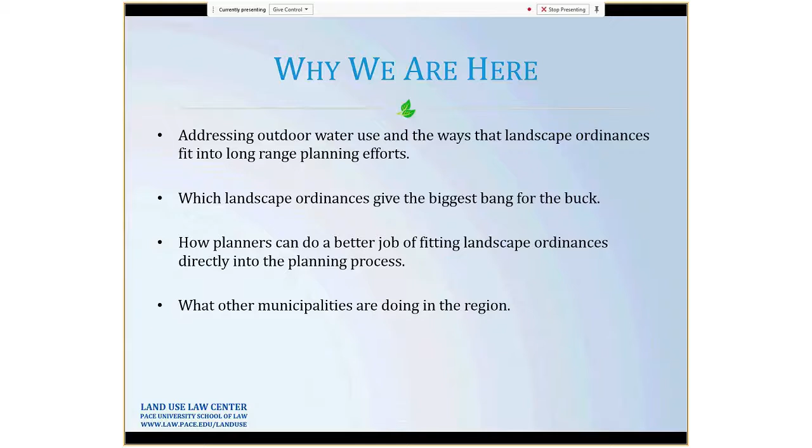We've got all sorts of folks on the call today too, from local government planners to water efficiency folks, green industry people, so we've got a good cross-section, and I'm really kind of happy about that. We've had a really good cross-section for all these webinars. So without further ado, I will introduce Rick Schultz, and I'll let you take it away, Rick, and I'll be back to take some questions at the end. Thank you.

Thanks very much, Kevin. I appreciate it. So for those of you listening in, I don't know exactly where you're from, but I just wanted to give a really quick overview of who we are. So the town of Castle Rock, we are a full-service local government that encompasses everything from police to fire, water, development services, parks and rec, and public works. So we do have everything under one roof, which does help from a coordination standpoint. Go ahead to the next slide, Tiffany. Okay, let's go one more, please.

Thank you. So as far as where we are, we're located along the I-25 corridor. We're midway between Denver and Colorado Springs. And something we think is really important to point out is that we are considered a semi-arid high desert climate, which is very, very important when you start talking about plants and landscape and irrigation requirements and all of those things, because that's critical when you understand that we are primarily a groundwater-based supply.

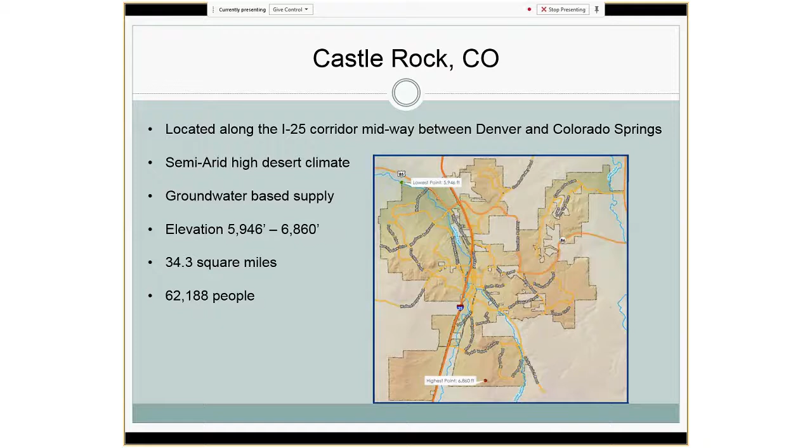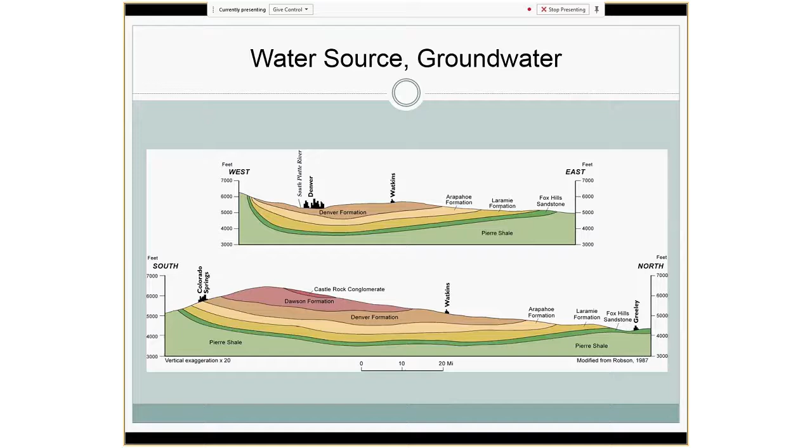Okay, so I mentioned that we are primarily dependent on the Denver Basin Aquifer System. That's our groundwater supply. And in spite of the fact that we are positioned quite well within the aquifer system, we still recognize the limitations, and we still recognize that we had a huge need to take care of our resources, conserve, and use water very efficiently. So go ahead to the next slide, please.

2006 was our first Water Conservation Master Plan that we filed with the Colorado Water Conservation Board. That identified a conservation goal to reduce from our current per capita 165 gallons per person per day down to 135, which was an 18% reduction. We were able to not only achieve that, but we exceeded and maintained that goal.

And then in our 2015 update, we identified a new goal, and that further reduced the projected demand from 122 down to 100 gallons per capita per day. If we achieve that, or when we achieve that, that will be an additional 18% reduction. Now, the other thing that's important to note there is that throughout all of this, it's obviously not sustainable. It's groundwater dependent, and we are very active in transitioning to more renewable sources. Go ahead to the next slide, please.

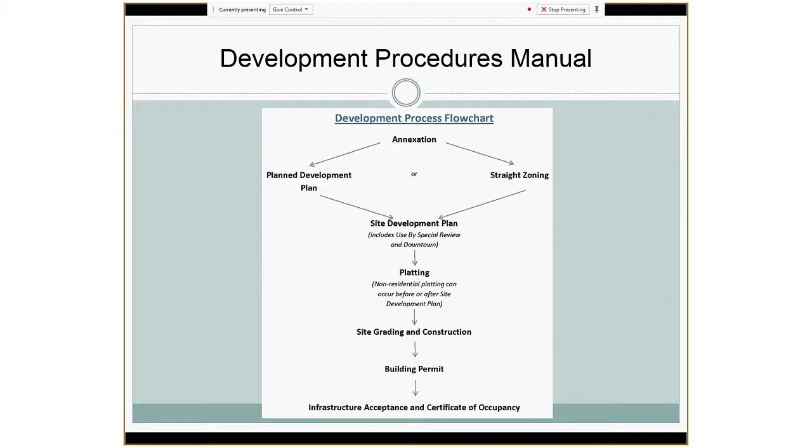And the other thing that's really exciting to think about at this process through development is that we are working with new developers, new communities that are proposing to come into the town. And so we have an opportunity through the water dedication, through the development review process, to actually talk about water efficiency, to talk about water conservation and what that looks like. And we've actually got several communities underway currently where we're working with them to develop a specific water conservation plan about how that looks specific to their development. So it's really fun stuff. It's really exciting. Let's go to the next slide, please.

So when you start talking about what you want your landscape to look like, soil amendment is critical, because without the proper soil amendment, you're really going to have to pour the water to it. You can keep anything green with enough water, but that's not really the goal. The goal is, let's prepare it right the first time, put ourselves in the right position to have a healthy landscape, and certainly not only that, but an appropriate landscape for the climate. And soil amendment is definitely part of that. And that runs the gamut of parking lots, streetscapes, multifamily, also not listed, but parks and apartment complexes, schools. We work with all of those organizations to make sure that what we're doing is actually appropriate and it makes sense.

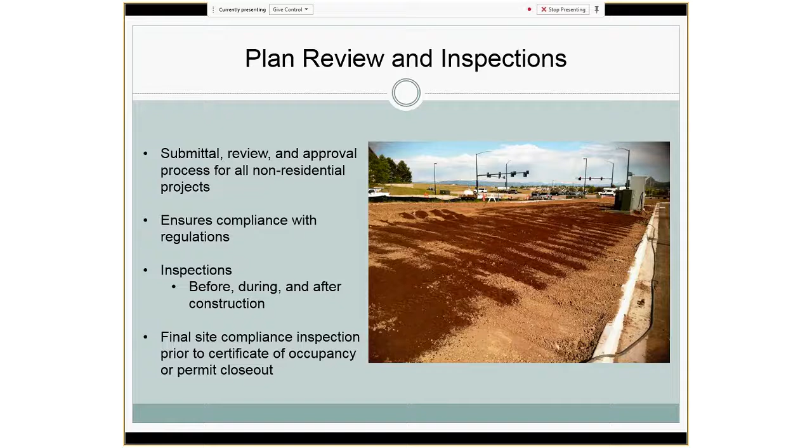Next slide, please. I've included this one just because this is a real-life example of a rain sensor, and I thought it was very interesting because it's installed basically where the majority of the sensor is obscured from above by the gutter, so it's not installed properly. And we've actually seen several examples of where equipment is not installed correctly. Actually, an extreme example of this is we saw an entire block in a residential neighborhood where the rain sensors were installed upside down.

So, it's things like that where you would expect a little bit better results from a professional landscape contractor, and I'm not sure what happened in this case. I think it probably was a training issue with one of their crew, but we were able to catch it during the inspection phase and get it corrected. Next slide, please.

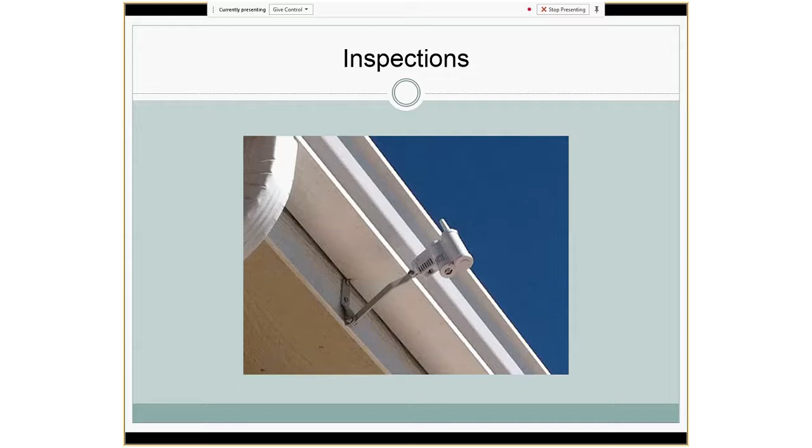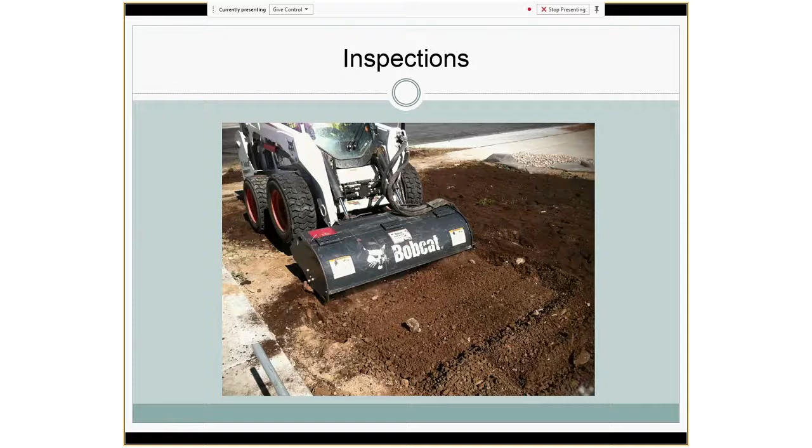And the other thing to note there is that, again, the ground is very, very hard, rock or clay in many cases, and so it does take some larger pieces of equipment. We've seen some people try and do this sort of thing with smaller equipment, and they're met with limited degrees of success. Next slide, please.

Next slide, please. And with that, I am done. So I'm going to turn it over to Lyle, and I think we're going to take some questions toward the end. Thank you so much.

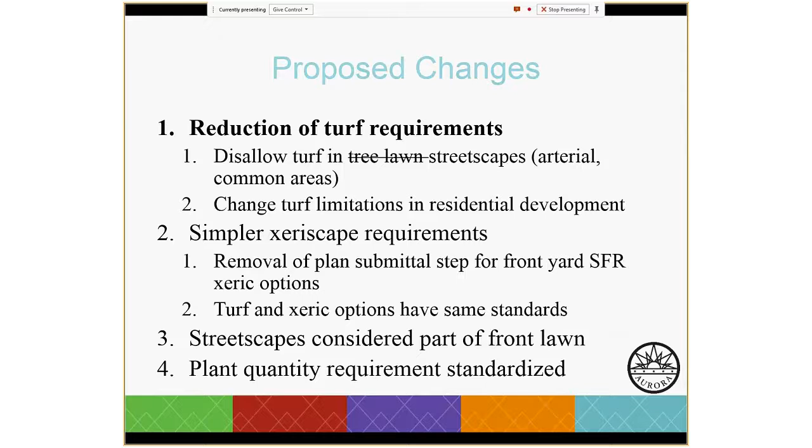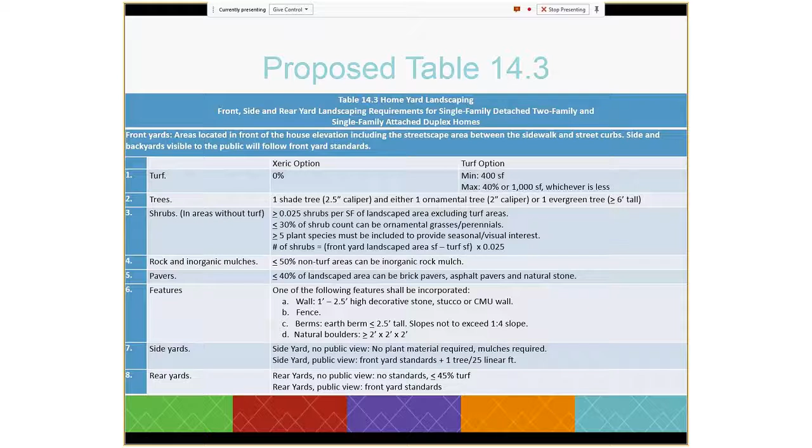And that's all well and good, but when you get to the shrubs, this is a very standard number, but again, 26 shrubs on a 500 square foot lot can look very different than 26 shrubs on a 3,000 square foot front yard. So we tried to make it standard and say that there's X number of shrubs per square foot, and we really tried to dial in that turf so that there was a maximum of 1,000 square feet. So even if you had an extremely large front yard, you were going to be limited. Next slide.

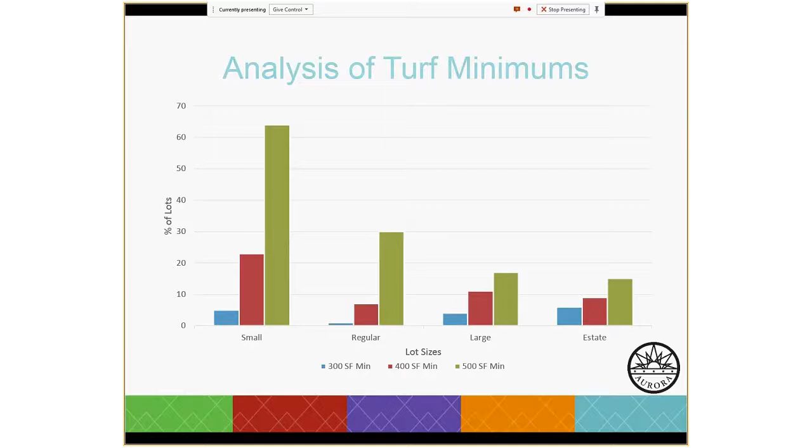We did an analysis of our lots throughout Aurora and all of the sizes, and we really landed on 400 square feet because we felt, based on the numbers, that not a huge amount of people would be affected, unlike the 500 square foot minimum, but enough people would be affected that it would make a change, whereas the 300 square foot option wasn't really going to do anything.

Next slide. So if we were to implement these changes, we're looking at potential savings of about 60 acre feet, or 31%, if the development in the next 5 years is the same as the development in the previous 5 years and the same type.

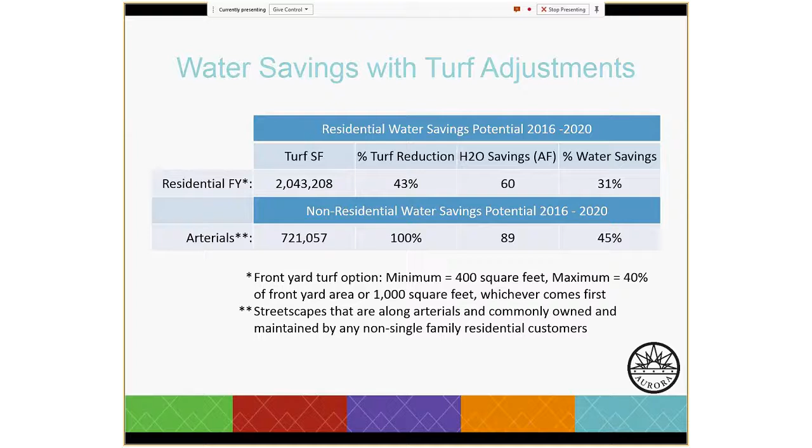One of the other things we're looking at that I haven't mentioned yet is that in Aurora, we have a lot of common spaces with HOAs or metro districts where there is a lot of irrigated area surrounding developments that is commonly managed. In these areas, we're proposing to remove the option of having bluegrass in the streetscape area at all. If we were to do that, predicting the same amount and type of development, we're looking at a 45% water savings just from removing bluegrass within that streetscape area. Next slide.

So the next 5-6 slides are renderings of what a typical lot would look like if these changes were to go in place. We'll kind of breeze through them, but the first 2 slides are an example of a small lot. Now, if we get the changes that we're looking for, and planning is putting them into the comprehensive plan they're developing right now, the small lot would potentially go from this to, next slide,

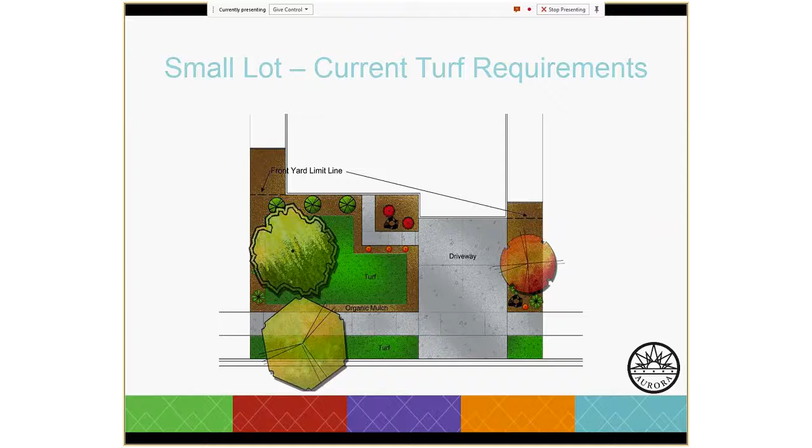to this. It really doesn't look like too much of a difference, but you'll notice that with that 40% requirement and including streetscapes in the front yard definition, homeowners or developers will be forced to choose where they want their turf. Do they want it in that streetscape area or in the yard? And we'll see a significant amount of savings. The other good thing is that by removing turf from the streetscape area, we'll reduce a significant amount of runoff, as you'll see in some pictures later in the presentation.

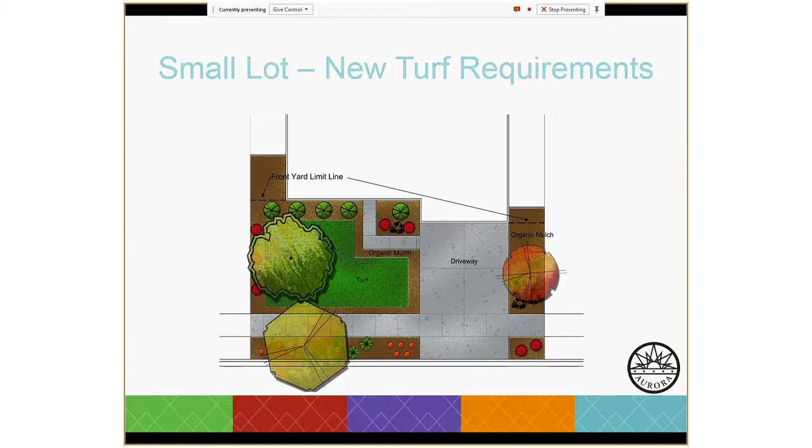All right, Tiffany, can you just zoom through the next few slides? They can look at them later, but essentially it shows you what it would look like now versus later. You can go ahead.

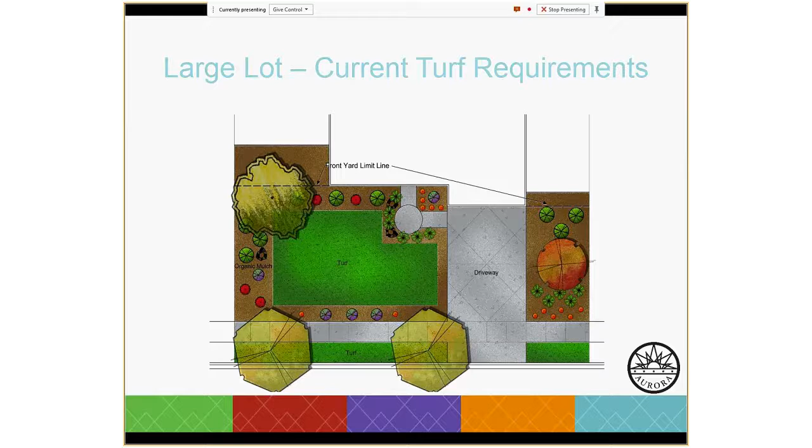All right, so let's talk about some of the incentives we have in place. Go ahead.

So in our code, back in 2014, we evaluated our tap fee structure. The way our tap fee structure works, especially for irrigation meters, is that you pay for what you put on the ground. So there's a dollar value per square foot for high water use area, Kentucky bluegrass. There's the dollar value for low water use or water-wise landscape. So up until 2014, we only had those 2 categories.

It doesn't show it on the slide here, but we went from basically 76 cents per square foot for the high water use to $2.75 per square foot, and essentially a 4-time jump as well for the low water use landscape fee. Well, as you can imagine, developers and builders really kind of freaked out a little bit. They got really concerned about the cost of their projects.

Essentially, this would bring, say, a 400,000 square foot irrigated area project from maybe a $200,000 cost to a little over $800,000, given the typical development patterns that we've been seeing. So that's a pretty significant jump for developers who are having to put landscape in before they can even build the first home.

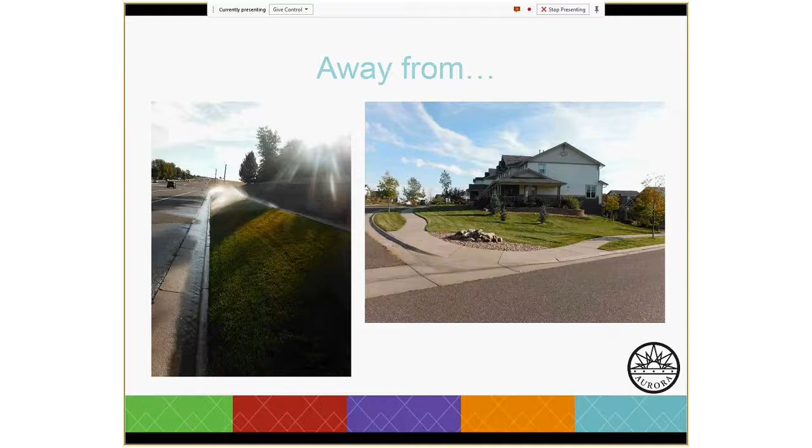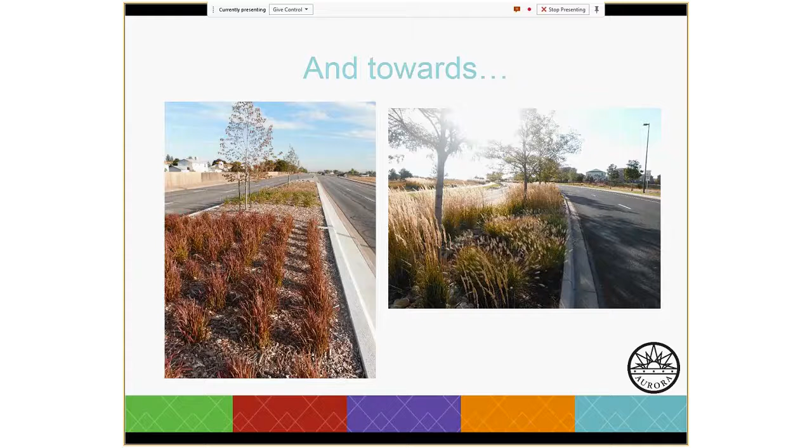Again, just pictures of things that we want to move away from. In the picture on the right, you can see the amount of runoff in that development. And again, they're meeting code requirements both on the irrigation side and the landscape side, but I think we can do better. Next slide. And so we're trying to move more towards a landscape that looks like this. Go ahead. One more. Maybe one more. And so the good news is that, as you can see, it's already being practiced.

So while the changes may seem drastic in our code and may make a significant change, the good thing is that developers are already on board and very interested. So the transition from now to the future won't be as painful as some of our elected officials and higher ups are worried about. So with that, I will end my presentation and hand it over to Linda.

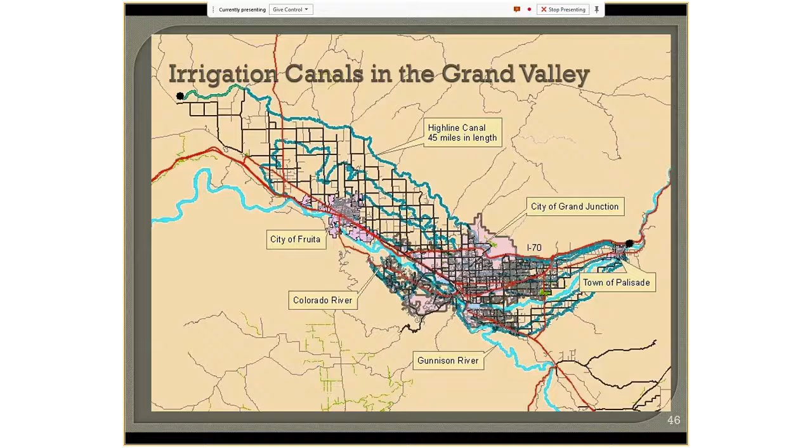We formed a technical review committee made up of local experts, landscape architects, landscape companies, developers, appraisers, realtors. We had a pretty diverse group that would give us feedback and involved all of these folks, including utilities and our community leaders. We didn't want to let them be the last to know. Next slide.

And we had several objectives. We definitely wanted to provide flexibility. We're a western county, and folks here are conservative. They do not like the heavy hand of government, and so they respond much better to having choice. So we wanted to provide flexibility and creativity and let the owners have some say in what they wanted on their properties as well. Did not want to raise the price of landscape to developers, definitely reward water conservation, and then we needed to give information to help people.

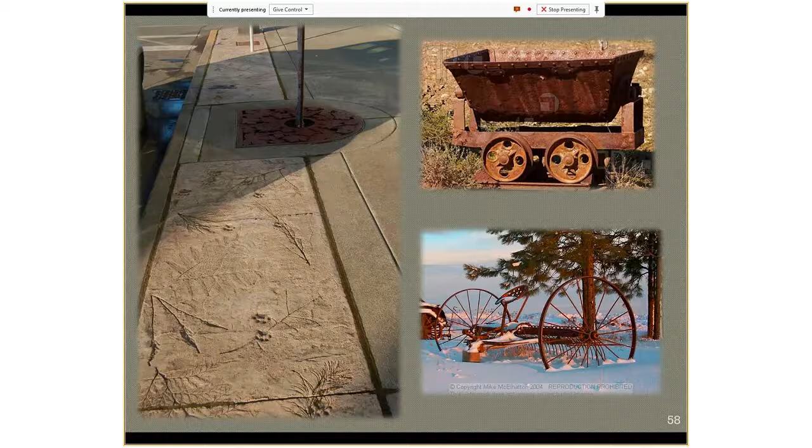We have a state statute in place that requires commercial landscape to be done by a landscape architect, as well as certain types of high-density residential development. So we weren't so worried about the complexity of the regulations. Next slide.

We did, as I mentioned, give freedom for choice, but we also try to give good information in our handbook, which we also provide to make those good choices. So here are two different types of plantings: clustered planting, which the committee determined to use less water in this type of design and be more efficient. And then there's the equal space planting that you see on the right side.

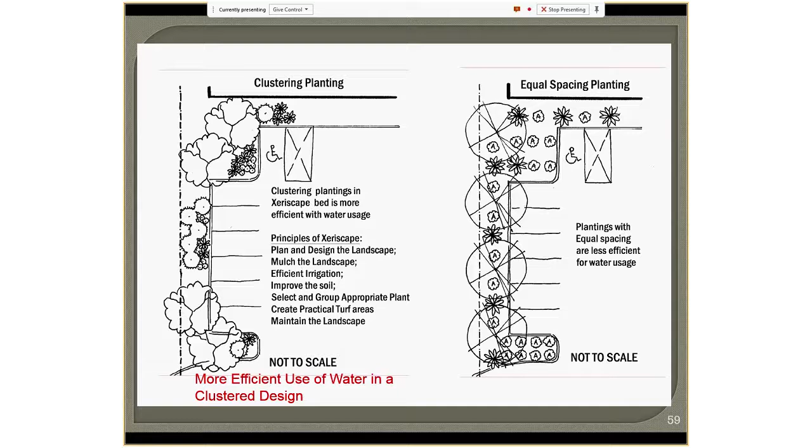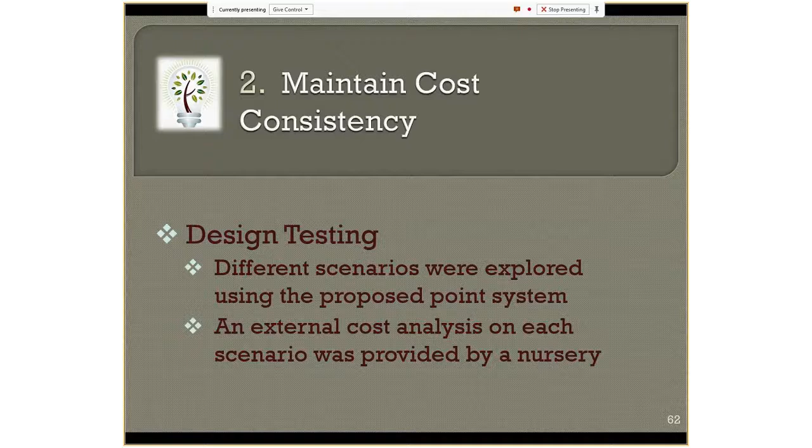Next slide, please. So our second objective was to maintain cost consistency. We did not want to be, again, heavy-handed and raising the cost of development here, be a disincentive for economic development in our area. So we did something that we thought was pretty transparent. We proposed several scenarios using the proposed point system and comparing it against our existing regulations. And we had a local nursery do the cost analysis for the design. So next slide will show you our first example of that.

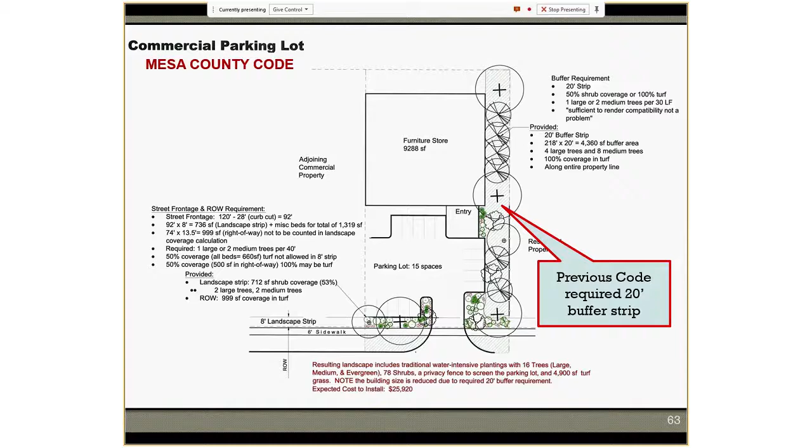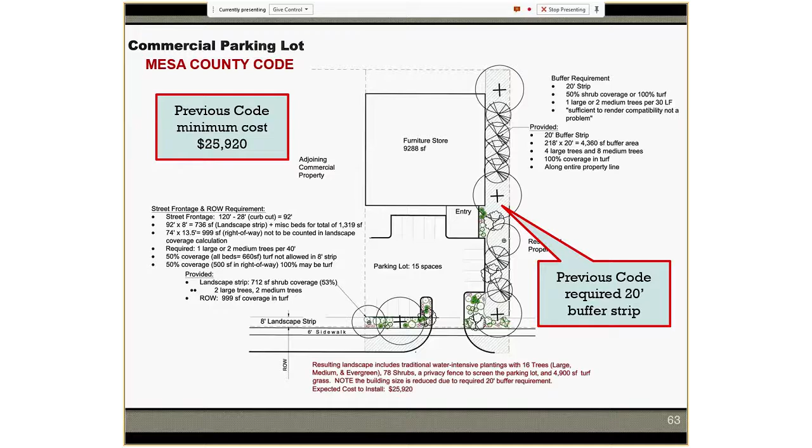So here we laid out a potential furniture store, a retail enterprise in that box that you see there on a limited site. And we populated the site plan, the landscape plan, with what our code required at the time before we made the amendments. Hit that button again, Tiffany. I think it'll pop the costs. Okay, there's a couple buttons, I think. So our previous code required a 20-foot buffer strip between commercial use and a use of a different type, let's say a residential use. So when we had a nursery cost out this design, it was almost $26,000. Next slide.

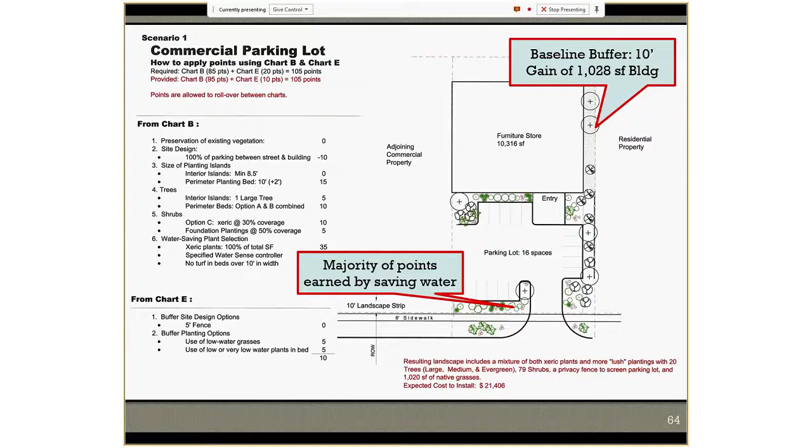So then we took a scenario and we applied the point system against it, using, again, a choice of points to achieve a desired landscape. We were able to, and keep hitting that button a little bit, Tiffany, we were able to reduce the buffer area between the uses to 10 foot. That gained 1,000 square feet for the building, so that meant more space for the retailer. And most of the points were earned by saving water, and so they used more xeric landscape. So a lot of choice. And this scenario was much less, 4,000 less than the previous under the existing code. Next slide.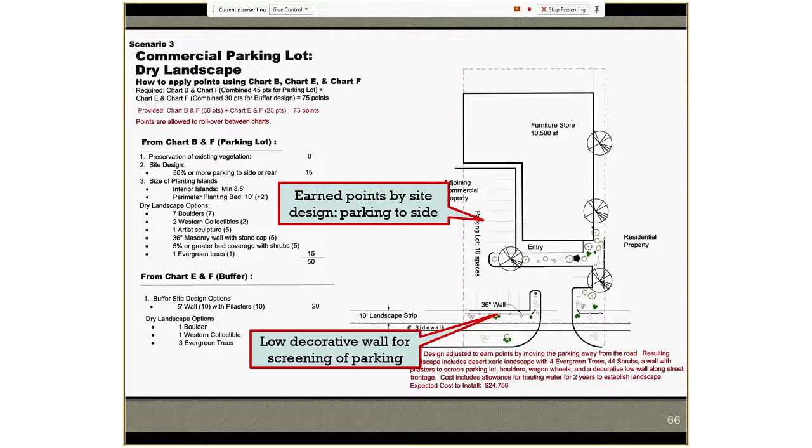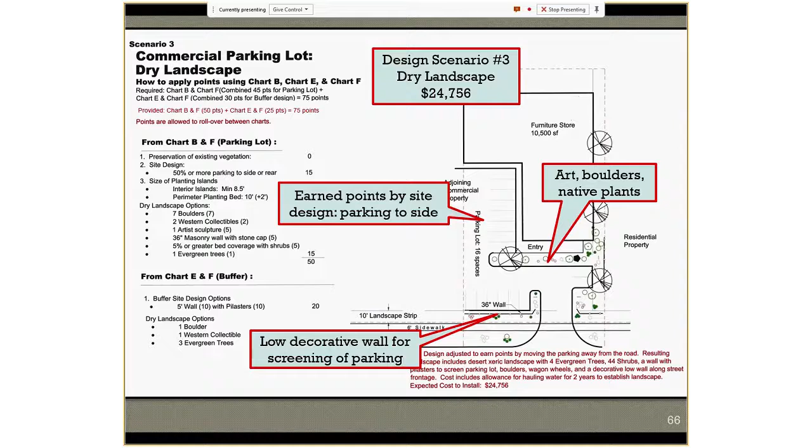And so our last scenario, scenario 3, shows what dry landscape would come out to be. There were options in the tables for using boulders, native plants. We use buildings a lot as design features on a dry landscape site. So instead of having all the parking in front, we try to get the buildings located in the front of the lot instead, so that you're not having to landscape a huge expanse of parking. So they earned points for their site design by putting the parking to the side, and then there's a decorative wall in the front that screens the parking. And the price, still less than the code that was in effect at the time. Next slide.

So the third objective was water conservation, and it's required in some contexts, encouraged in others. We work with the water districts. We have several special districts that provide domestic water, spread throughout the county. We may have about 7 or 8. Some of them will not allow outdoor water taps. They were very enthusiastic about supporting our options in encouraging the xeric and the dry landscape. Next slide.

And this is an example, one more push. This is an example of not xeric landscape. So this was one of our outcomes that we did not want to see. Next slide.

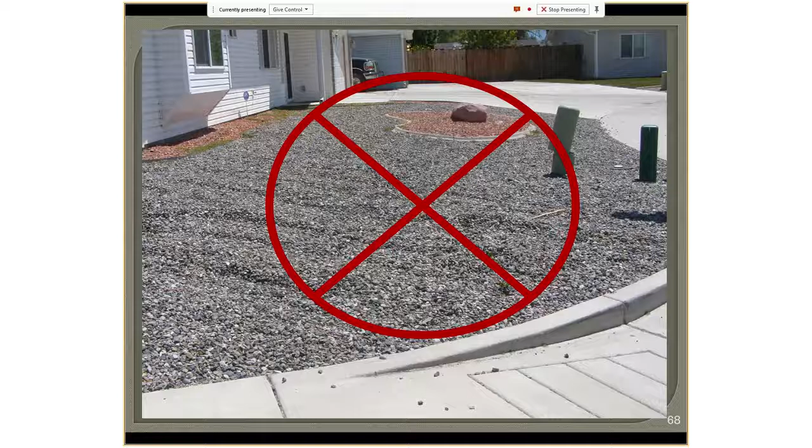We don't have storm drains everywhere, and there's a lot of detention and release of stormwater runoff that goes on with our developed properties. And so we had to figure out how to make these look more sightly, and we did that with our regulations. Next slide. So some more examples of xeric landscape. Next slide.

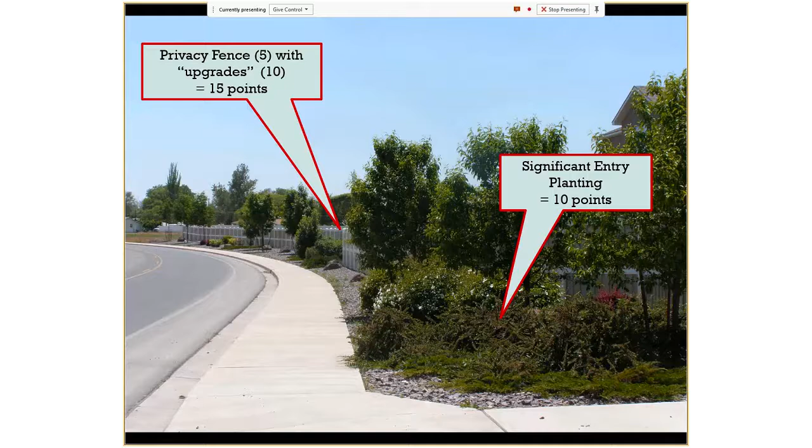This is a residential subdivision, same thing. Here you see more street landscape, cluster plantings with a privacy fence that had some upgrades on it, some decorative upgrades. Next slide. Okay, you've got the points. Okay.

So our code format, we have the tables, but the first thing to do when you look at the land development code is to identify the use. And there's a master table that talks about what use is proposed, whether it's commercial or multifamily, whatever it is, and then it specifies which tables, subtables are appropriate to use for the various landscape requirements. And so there are subcharts. Each subchart has a minimum number of points, and then there are options within that chart. So there's standards for the materials to be used and a landscape handbook. Next slide.